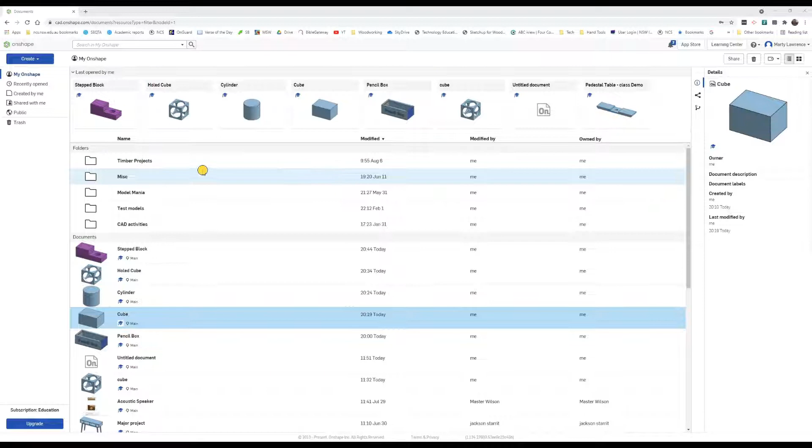Okay, we're going to continue with our Onshape basics. So we'll open up Onshape, click Create, a document. This time we're going to make a dice.

I'm kind of making this up as I go. What we can do with this is create a dice that we could 3D print. So this dice is going to be 20 by 20 by 20.

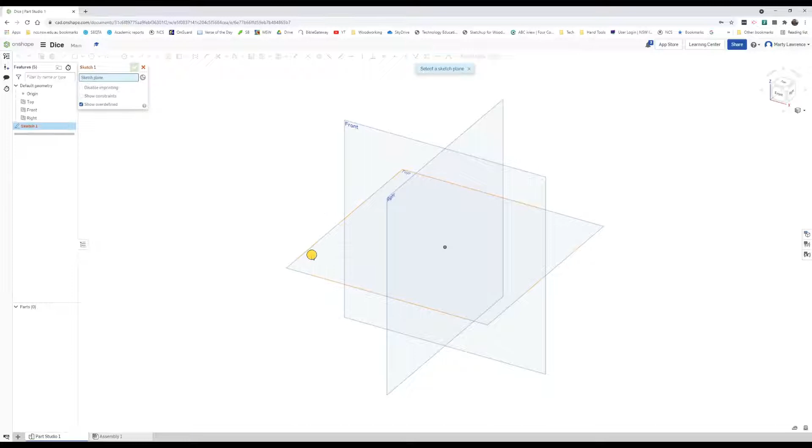It starts as a cube, so you should remember how to do that from before. I'm going to go through pretty quickly. So sketch on the top plane, let's turn off all these things we don't want, use the rectangle tool, and dimension it.

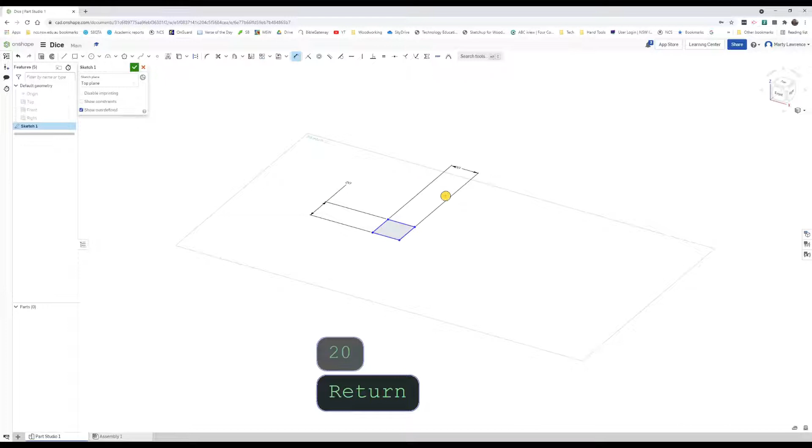Now if I'm going too quick, maybe you need to go back and remind yourself how this is done by watching one of the earlier videos. So let's zoom in so I can see it a bit better, and tick. We're going to extrude a distance of 20 millimeters. There's our cube.

A cube with square corners will not roll very well, so we're going to add what's called a fillet. We'll look in the top toolbar for the tool called fillet. As you hover over each of the items, it'll give you its name. So, fillet - we're going to click that.

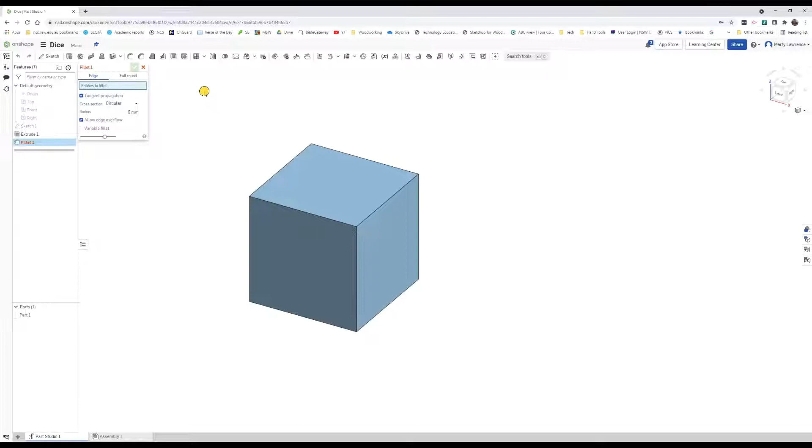We in fact need to fillet every edge of this cube, so this can be a little bit tedious. I wonder if I highlight... you see what I did there? I dragged a box and it selected every edge of that cube.

Now 3 millimeters is way too much. It's probably going to look better at maybe 1 millimeter, maybe 2. Yes, that looks good, I like that.

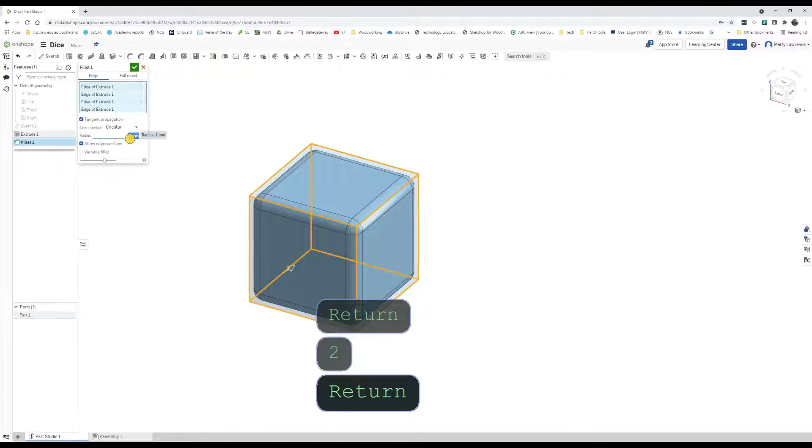Fillet tool, drag the box around your shape - it's selected everything. Set it to 2 millimeters, then tick. Look at our cube now, it's got nice curved corners.

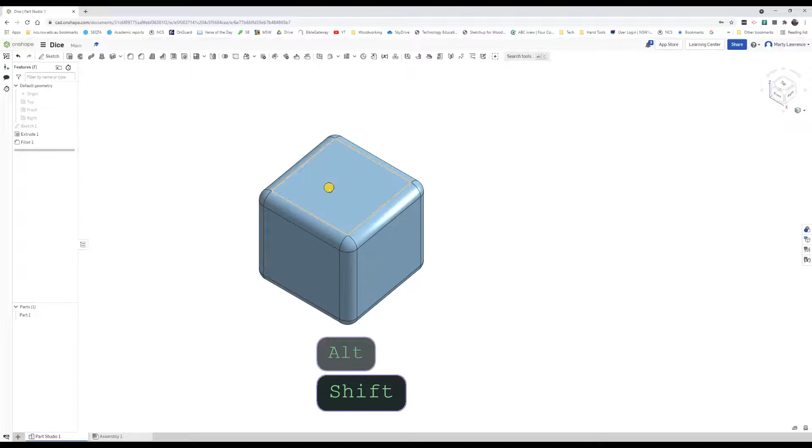So we're going to add text to each of these faces. We're simply going to do numbers, and this needs to be done multiple times. I'll do it a bit slowly for the first one, then I'm going to go quick for the rest of them.

You might just watch the first one and then you get the hang of it. You'll have to fast forward the video to the part where I show you how to export it ready for 3D printing.

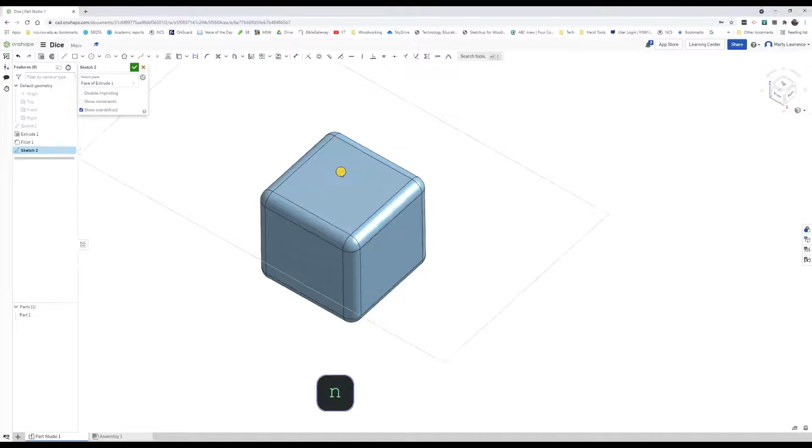So sketch - the sketch plane, we're going to click on the top surface. I'm going to click N, so I'm viewing it on top. Now we're looking for the text tool, it's the A inside a box. Click it and drag a box.

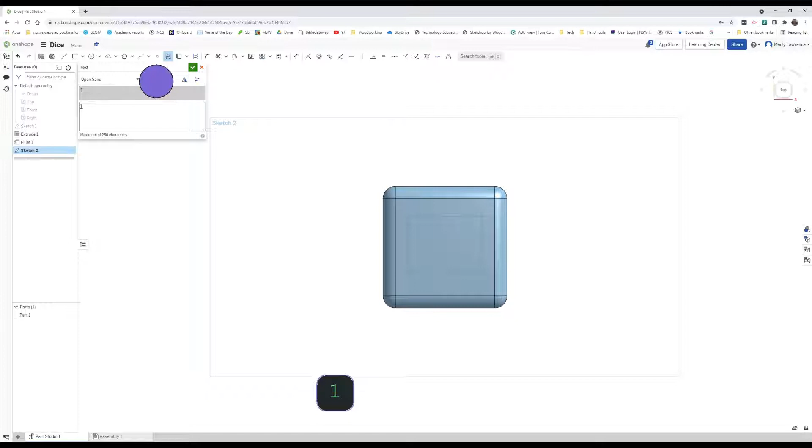This is a drag, this one - everything else we've done before has been click and click, but this one you actually drag. Simply type 1. You could change your font and so on, I'm just going to bold it. I'm happy with that, and tick.

Drag this - I'm happy with the size of that too. Size can be edited using the dimension tool, so we click on an edge and you could set it to whatever size you think looks good.

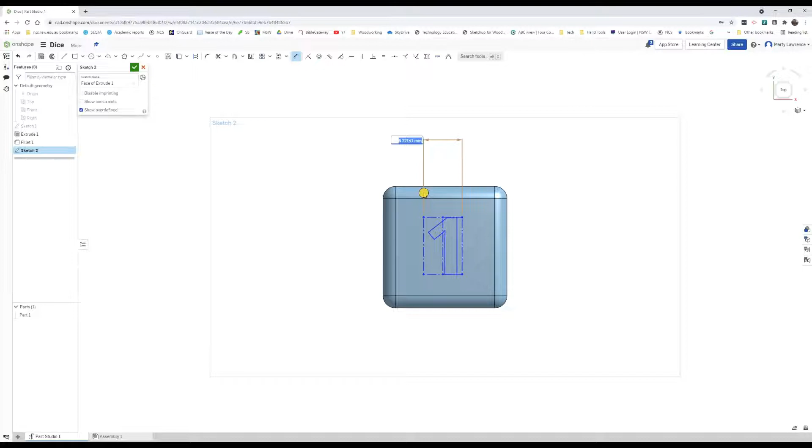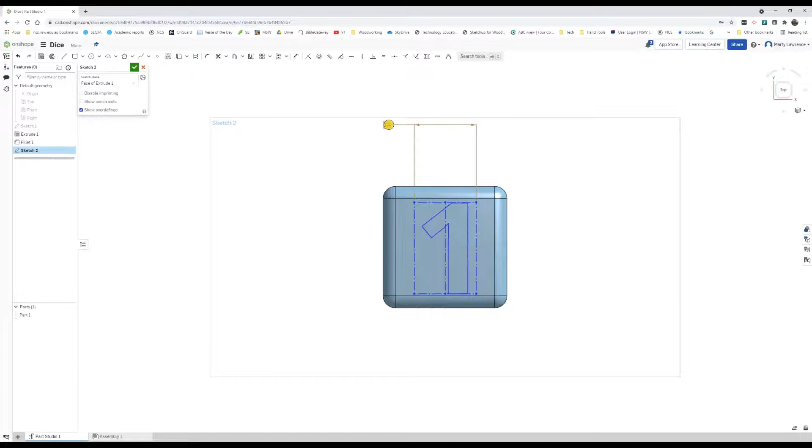Notice what happens, it moves the whole thing. Once you've done that, you have to deselect your dimension tool, and grab a corner - let's put that in, I'd say 10 mils, nearly too big, so we can edit that. Let's go 8, grab a corner, move it back in.

Right, I'm happy. Tick to finish the sketch, and also we'll go back to a 3D view. So we're going to do an extrude.

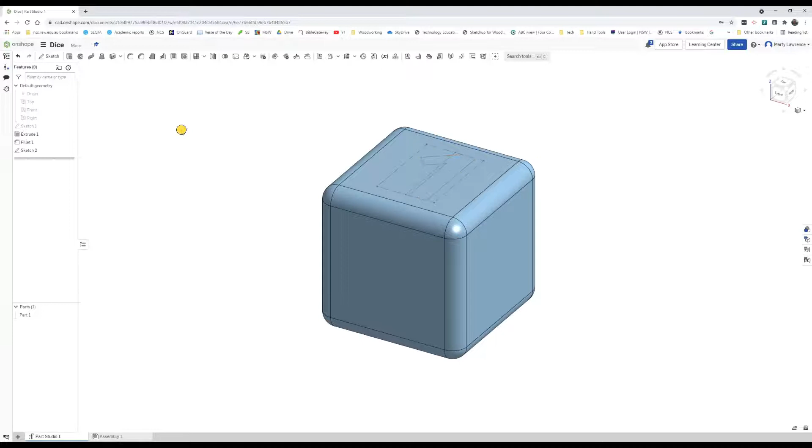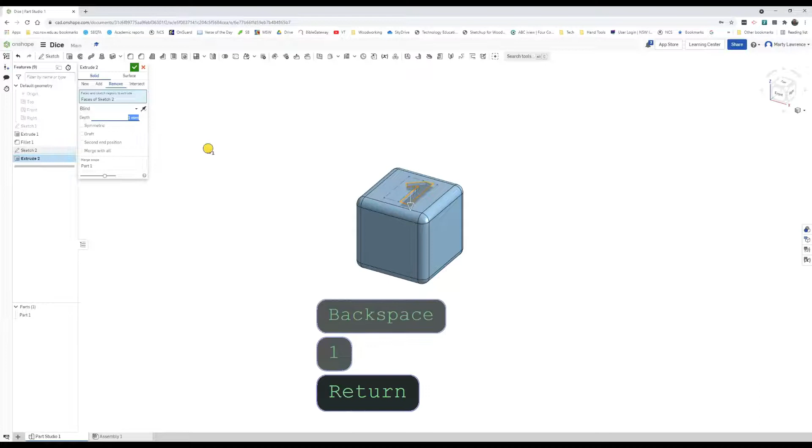We select, highlight, make sure your text is selected by clicking that box we've just done. Click, and straight away it wants to do an add, but we want to do a remove. We don't want to go all the way through, because then the dice wouldn't work. We'll go to a depth of, I think, just 1 millimeter. I'll type 1 and have a look. Yes, 1 millimeter would be adequate. Tick. There's our first one.

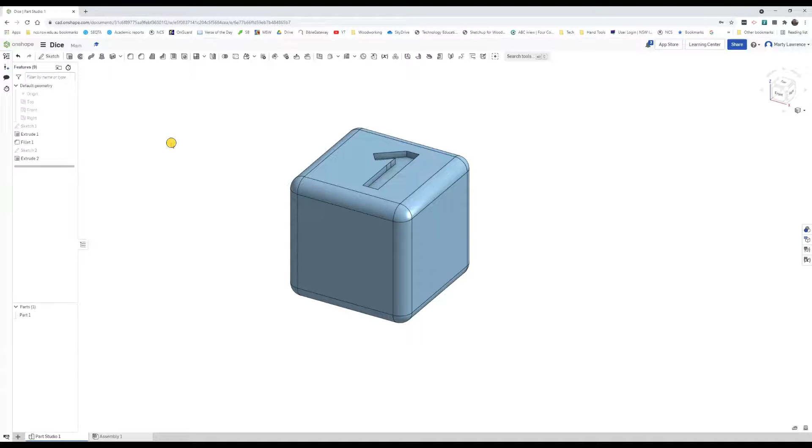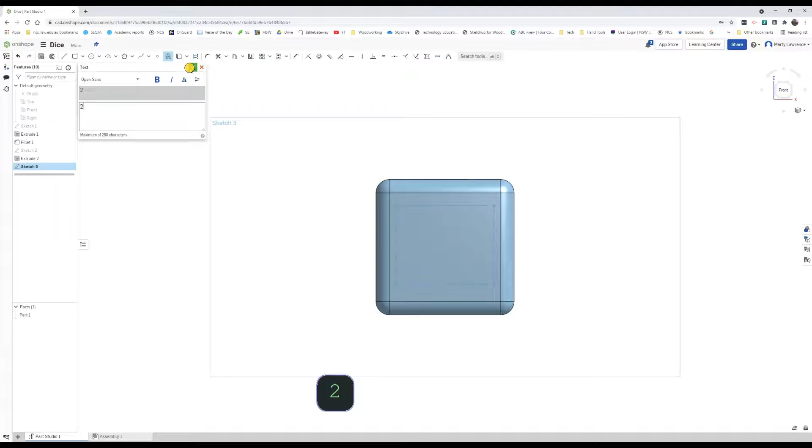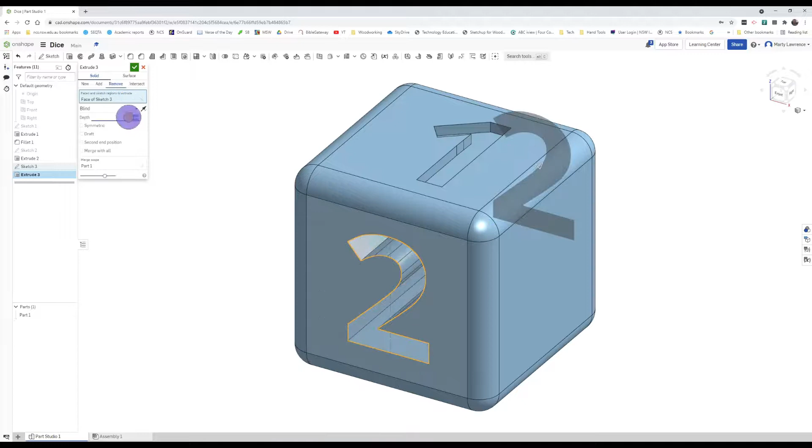We're going to do the rest, 2, 3, 4, 5, and 6 on every other face. I'll do the next one a bit quicker, then pause the video and unpause it later on when we're done. Sketch, select the surface, click N so we can look at front on, text box, drag, type a number, click bold, and tick, and it will drag the corner to center it. Tick again, went back to a 3D view and extrude by selecting the text. We need to set it to remove and set it to 1. And tick.

Now there's probably a certain order that you need to do dice. I don't know. Maybe the 3 happens to be opposite the 1. I don't know. Anyway, I'm going to pause this video here. I'll resume once I've added all these numbers all the way around.

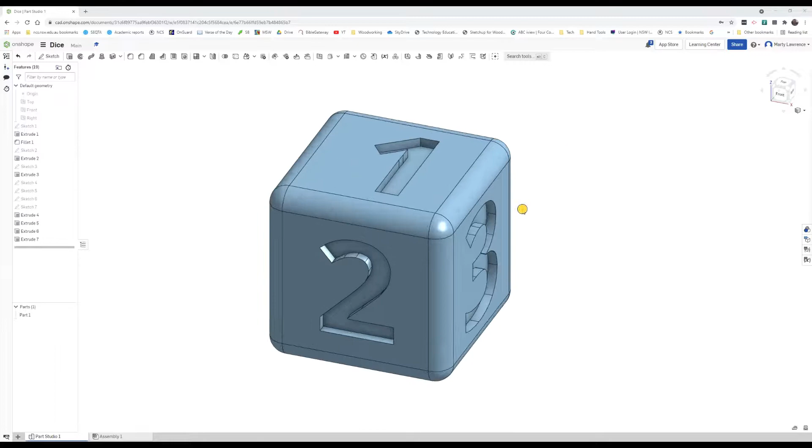Okay, I've finished my dice. Got all my numbers extruded down 1 millimeter on each of the faces. It's ready to 3D print.

So there's 2 ways we can do this. There's the easy way where I will do it all for you, or you can export it yourself, then email me the file. If you don't know how to save files on your computer, then email it. Maybe that's not for you.

So the easiest thing to do is click the share button. You'd have to type my email here. martylawrence@ncs.nsw.edu.au and click share.

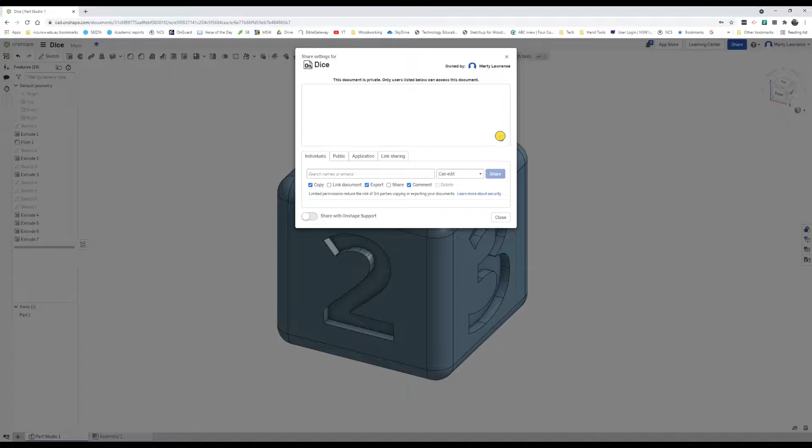For those who think they can download files, this is what you do, and email files. Over here in our parts, right click and go to export. Now we get this dialog. I'd like you to rename this dice and then your name.

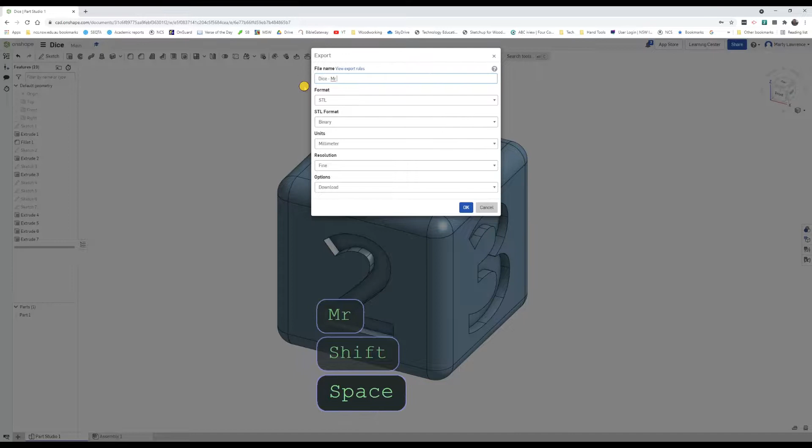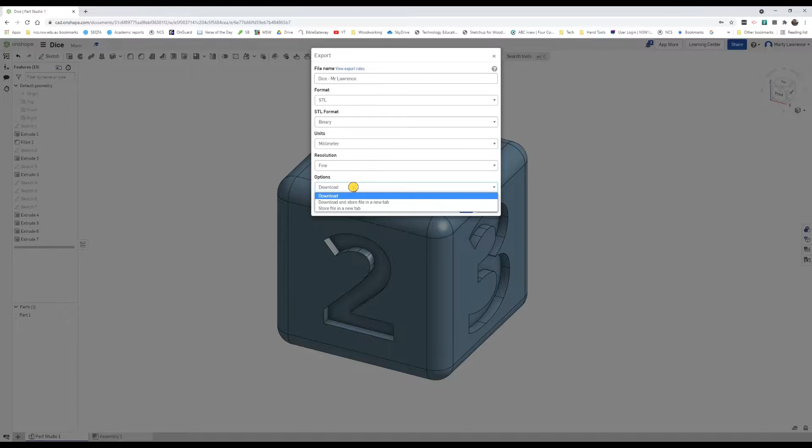We need to change the format to STL. Everything else here should be okay. The resolution is set to fine, units to millimeters, and the option should be download, and click OK.

It'll do its thing and then bring up a dialog on where you want to save that file. So you need to know which folder you're saving it into, because you need to access it later. So I am going to save it into my desktop.

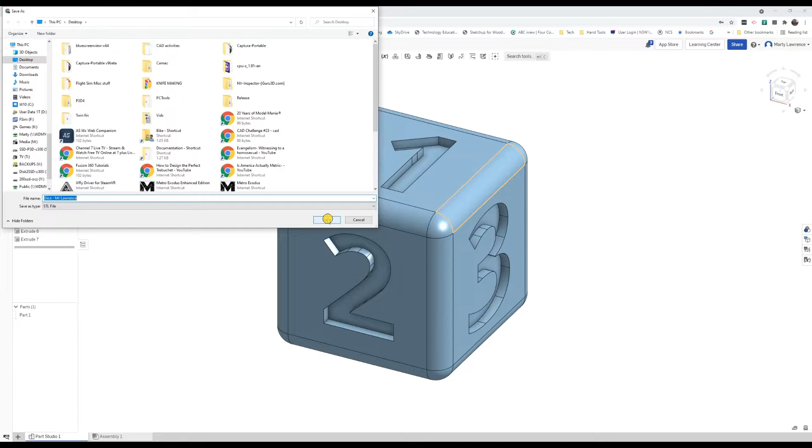And then, of course, we can click send, and I'll get that, and sometime in the near future I'll print it for you.